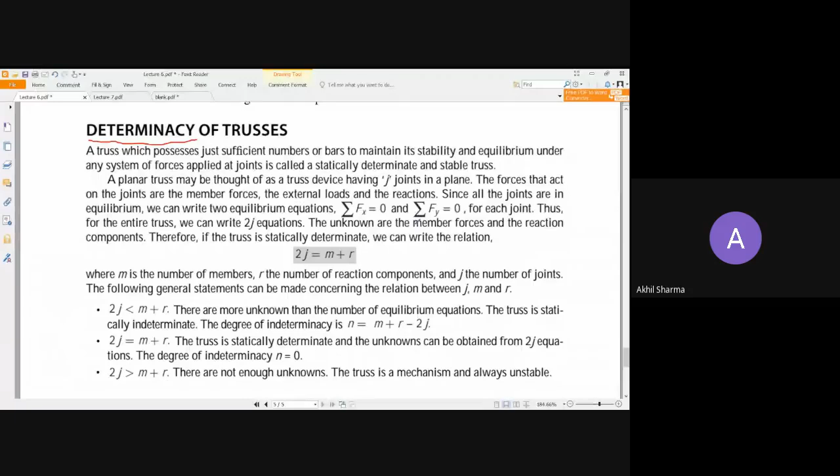Determinacy. The process, means the process, yes. The process of finding the value. No, not process. Process of finding the value is determining only. Because if you say simply that determining something in a truss, that means there has to be a process by which you will determine something, whatever that something is.

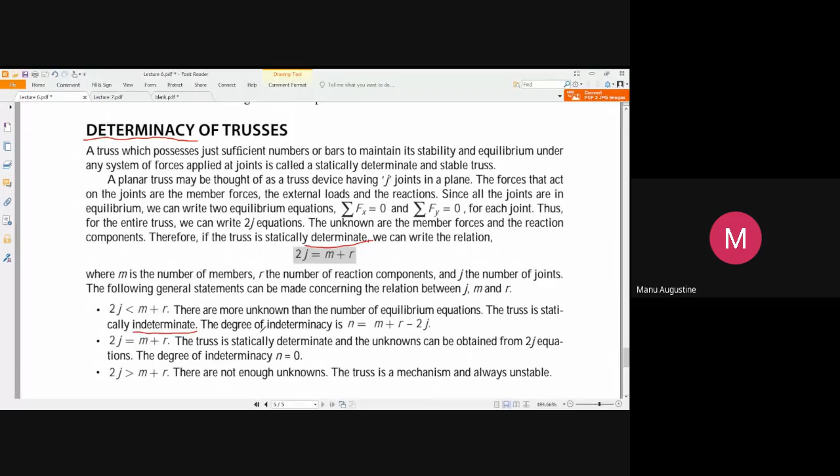What is it that you want to find in a truss? What you want to find in a truss is the forces in the members.

For example, let us say this is a truss, and let us for a moment forget that this is a deficient truss. Let us just assume that there is a diagonal also. If you just put a diagonal here, then this truss becomes stable, and now you can apply the loads.

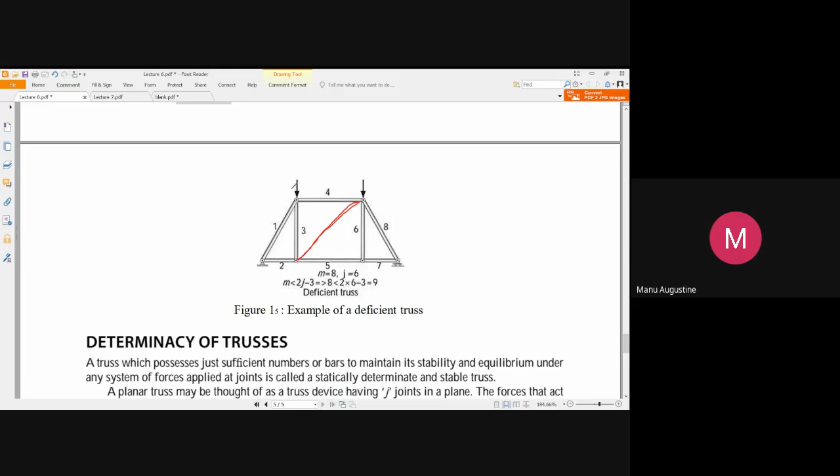So if I apply the loads, this truss is bearing these loads. That means it is now carrying the loads and it is not getting distorted. Now, once the loads are being carried by the truss, the engineers are now interested in understanding what is the individual experience of these members.

What are you feeling? So each of these members, once the complete truss is loaded externally, will be either feeling tension or compression. This was also explained by me in the previous class.

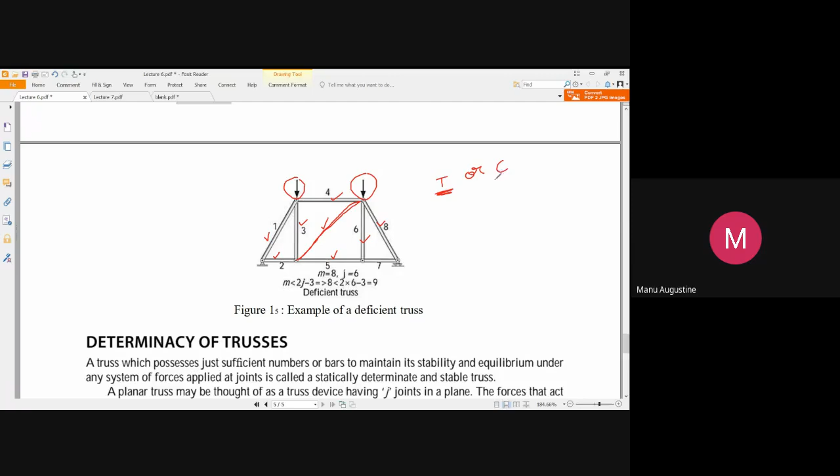So this is what you want to determine in a truss. An engineer makes a truss for some purpose, for a bridge or for some arch or something like that.

He installs in its place, and now the engineer is interested in knowing whether the individual members are happy, meaning whether they are capable of bearing the load or not. That becomes the next stage of design. But as students of engineering mechanics, your scope is limited to determining the individual forces of these members.

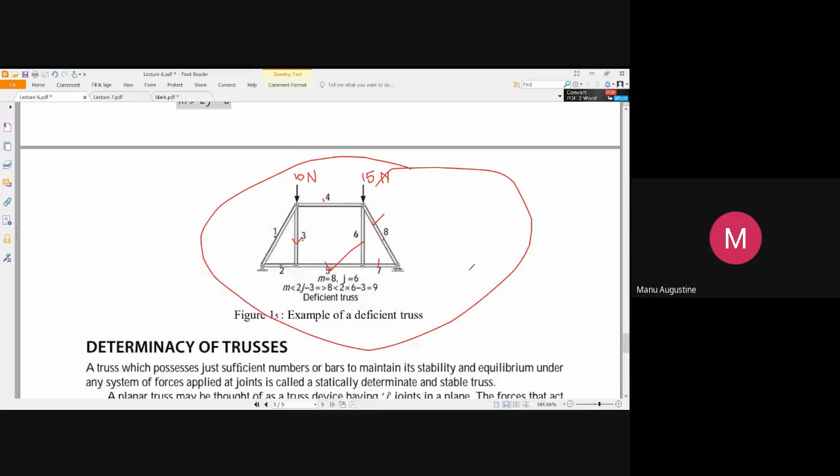Now there is another thing that stands in your way of determining these forces. There is a reaction developed at the supports also. This is a roller support, so it will only generate vertical reaction. This is a simple hinge support or simple pin joint, so it will generate two reaction components: reaction in the vertical direction and reaction in the horizontal direction.

Now, as the mathematics of statics governs, until and unless you find the values of these reactions also, you will not be able to determine all the forces in the members. We will see it in a numerical example later on.

So eventually what I'm saying is, in a given truss, what are the things you want to determine? The first thing is individual forces in the members and their nature, whether tensile or compressive. And because they cannot be determined until you find the values of reactions at the supports, your goal of achieving the determinacy of a truss involves, whether you want it or not, finding the reaction components also. So overall, you have to find all the reactions and all the forces in the members once the truss is loaded. This is what is called determinacy of trusses.

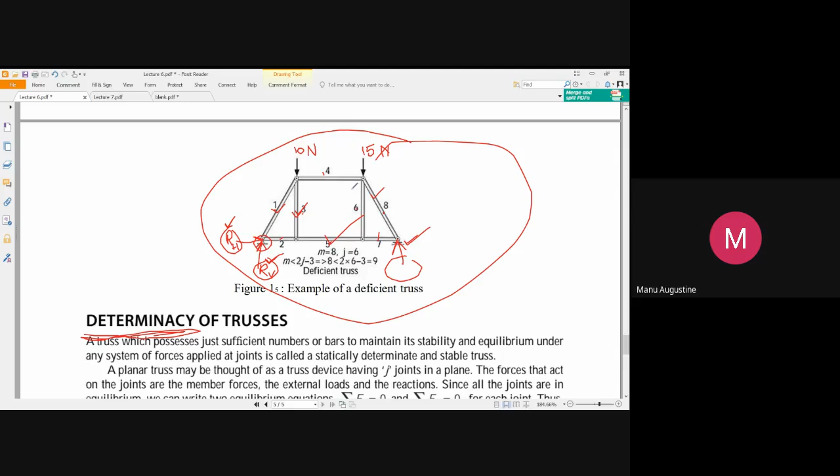Did you understand this concept? What is the meaning of determinacy?

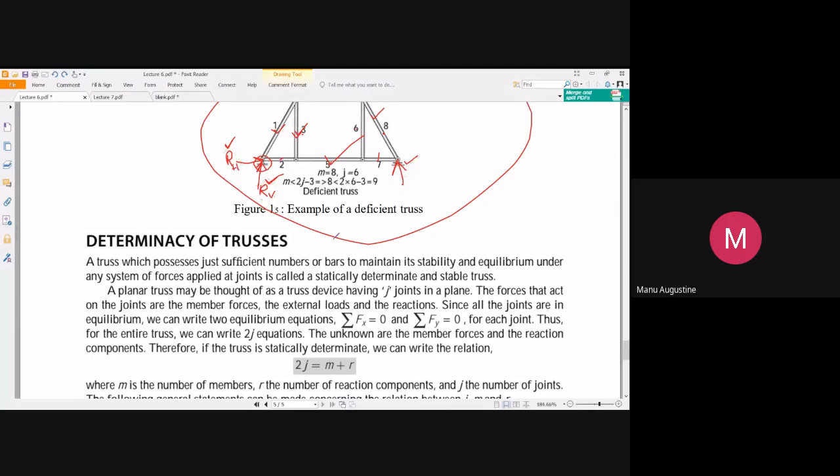What you have to determine is the individual forces in members and the reaction components.

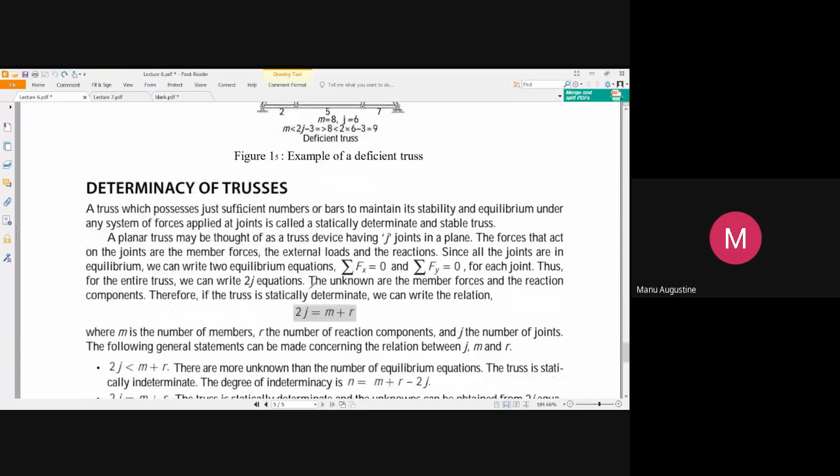Now there is again a mathematical relationship that gives you the direct answer to this question. What does this relationship say? This relationship says count the number of joints in your truss.

So let us come to this truss. Now we are discussing this truss. How many joints are there? Somebody please put the microphone on and tell me how many joints are there. The number of joints is 3. 1, 2, 3 - three joints are there.

Okay, now again this equation says count the number of members in this truss. How many members are there? Three. The value of number of members is equal to 3. First member, second member, and third member. There are 3 members.

And now, the third thing required is how many reaction components are there in your truss. So in order to find the number of reaction components, first you have to see how many supports there are. There are 2 supports, the first support and the second support. Now try to see what reaction components are possible for both supports. The first support B is a simple pin joint. Can anybody tell me how many reaction components will be there at point B?

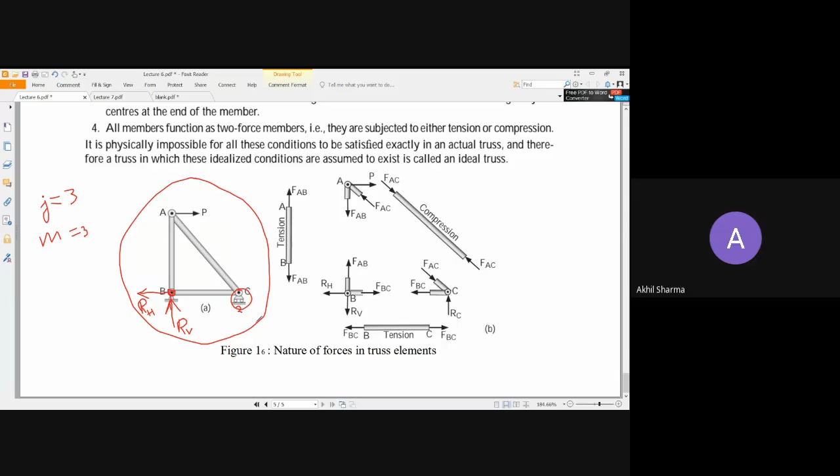Okay, what is the type of reaction and how many reaction components will support 2 have? There will be only one reaction component because of the rollers. We spent a lot of time in the last class studying that if there are roller supports, the roller supports are incapable of developing horizontal reactions. Roller supports never have a horizontal reaction. So only one reaction will come here, which is vertical.

So how many reaction components are there in this complete truss? There are 3 reaction components - 1, 2, and 3 reaction components. So R is 3 in your truss.

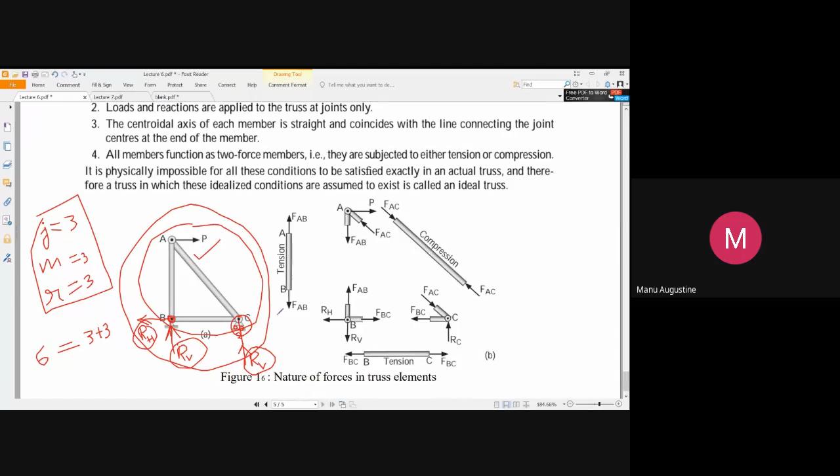And now apply this equation, 2j equals m plus R. What is the value of 2j? Find it from here - 6. 2j is 6. Is it equal to m plus R? Yes, sir. So if this equation is satisfied, which is true in this case, then you say that this truss is determinate. Now tell me, how many total unknowns are there in this?

Just look at the truss, forget about everything, and if you have understood whatever I have said till now, just tell me how many unknown forces are there in the complete truss.

Obviously, as you can see, the force in member AB, this one, the force in member AC, this one, the force in member BC, this one. So these 3 are definitely the unknowns that you want to determine.

And these 3 cannot be determined until and unless you already know the values of these reaction components. So in order to find these desired values of forces, you must have the values of these reaction components also. So this also becomes a necessity - we have to find the reactions, whether we like it or not.

So how many unknowns are there? One force unknown, second force unknown, third force unknown, and 3 reactions unknown. So total unknowns are 6 in number, and that is what the right hand side of the equation represents. This m plus r indirectly tells you how many unknown values are there in your problem.

So if you want to find out - someone randomly draws a truss and gives it to you, and asks how many unknown things you need to determine in this truss - you simply calculate m plus r. That will be the answer to the number of unknowns.

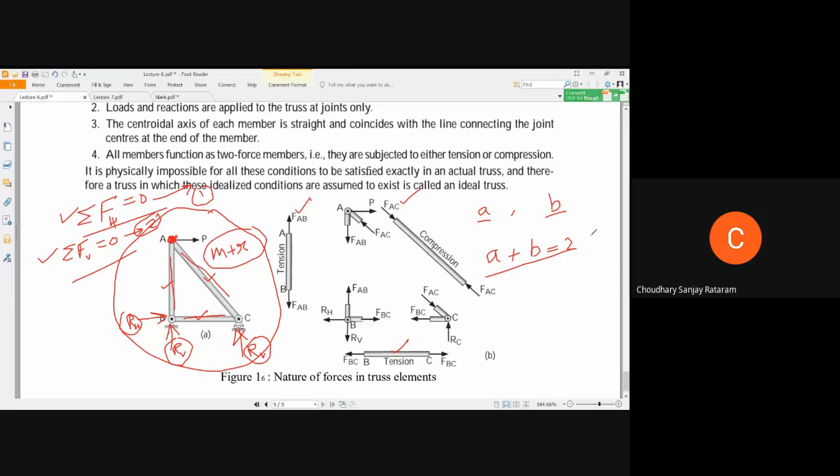Can you find the actual true values of a and b with the help of one single equation? Tell me - can you do it? No sir, you can never find the actual values of a and b because there are infinite number of possibilities.

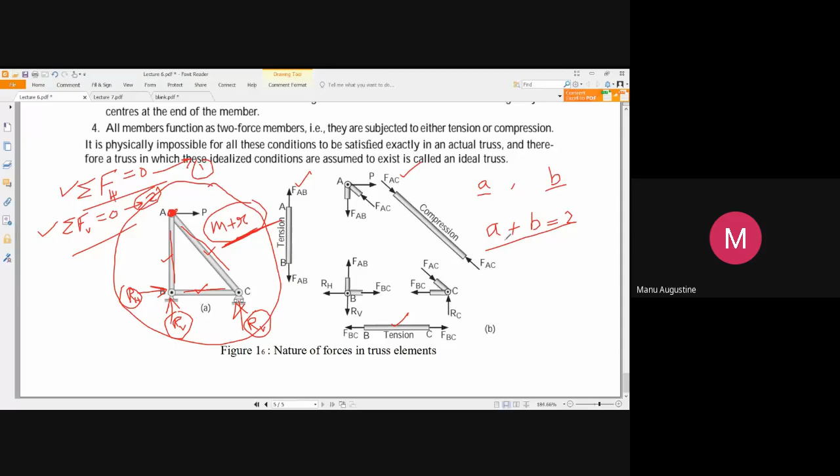Now the statement which we're discussing earlier, if there are two equations, let us say a plus b is 2, but a minus b is 1. Now there are two equations, equation number 1 and equation number 2. So how many unknowns are there? Two unknowns are there. How many equations are there? Two equations are there. Now this problem becomes determinate.

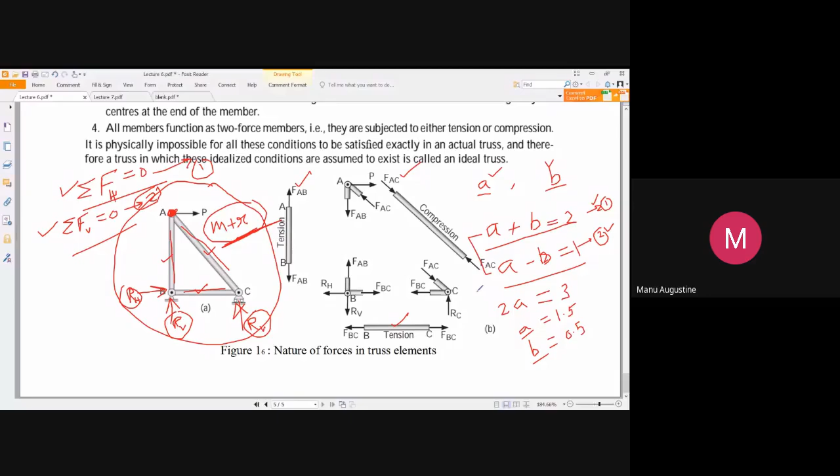If you have n number of unknown values and mathematically you want to find all the n values, then you must have at least n equations. Otherwise you won't be able to solve it. You will never be able to find all the unknown values. So this is the simple logic behind this equation. Now you know what is the logic behind this equation.

Let us once again recapitulate the equation. M plus R is the number of unknown values. 2j is the number of equations. So as we just understood with the example of A and B, if the number of unknowns is exactly equal to the number of known equations, then the problem is determinate. That means you can find all the unknown values of the problem. That is why this equation has been constituted like this.

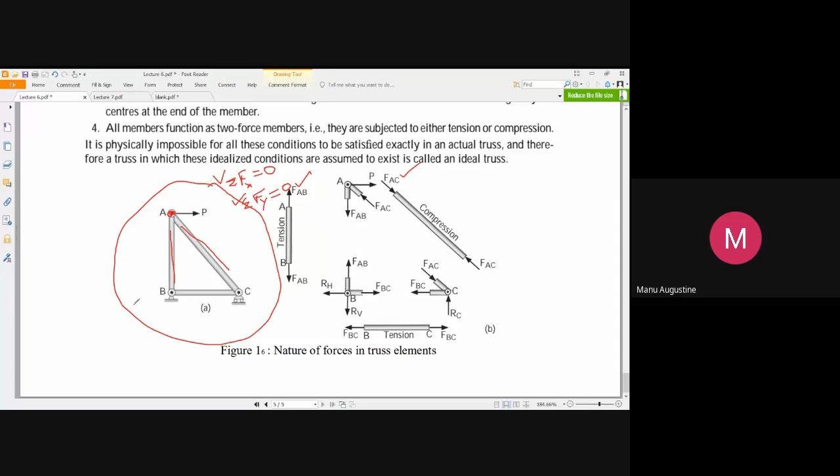Because each joint J represents two equations. Summation of x forces equal to 0 is one equation, and summation of y forces equal to 0 is the second equation for each joint. So if every joint has these two equations, how many total equations does this whole truss have? Twice the number of joints. So that is the eventuality of 2j here.

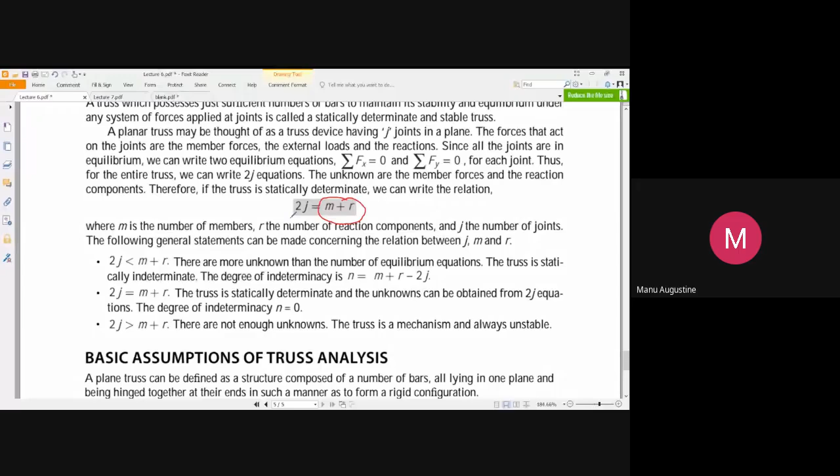So 2j is the number of equations, m plus r is the number of unknowns. And if the number of unknowns is exactly equal to the number of equations, then the problem is determinate. So this is the concept of statically determinate and statically indeterminate problems.

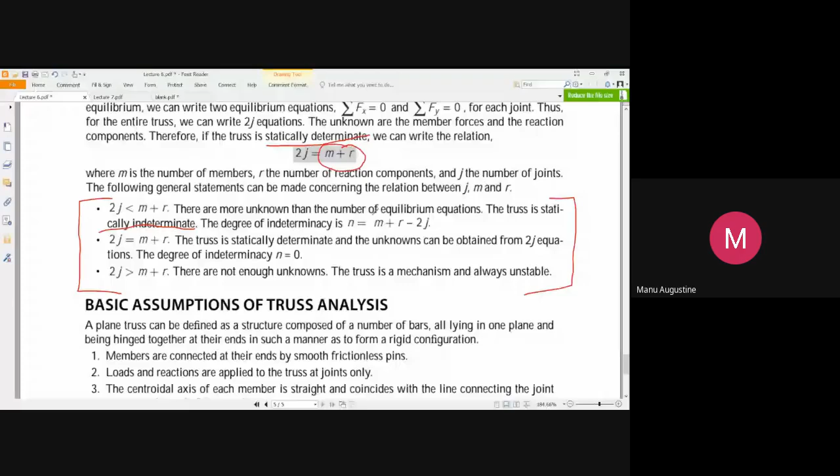Now you read up these three sentences and you can eventually get a good understanding of what this thing means. This small explanation and this small topic can be asked separately in your exams and not as a part of some numerical. You might be required to explain the concept of static indeterminate and static determinate trusses. So you have to expound this particular part in your own words. This much part that I explained here, plus this theory given here, if you remember it and remember how to put it in your own words, this should be sufficient for your examination.

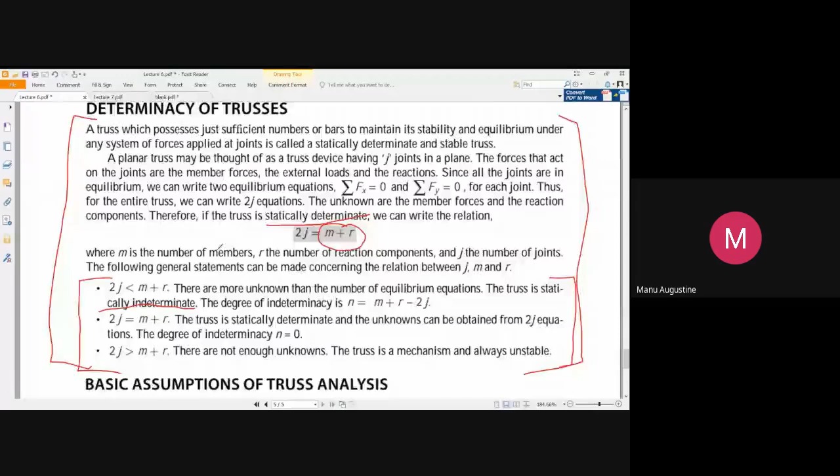Now, basic assumptions of truss analysis. You have to remember this. This is specifically mentioned in your syllabus. This can come as a 2 mark question for you. What are the assumptions taken in truss analysis?

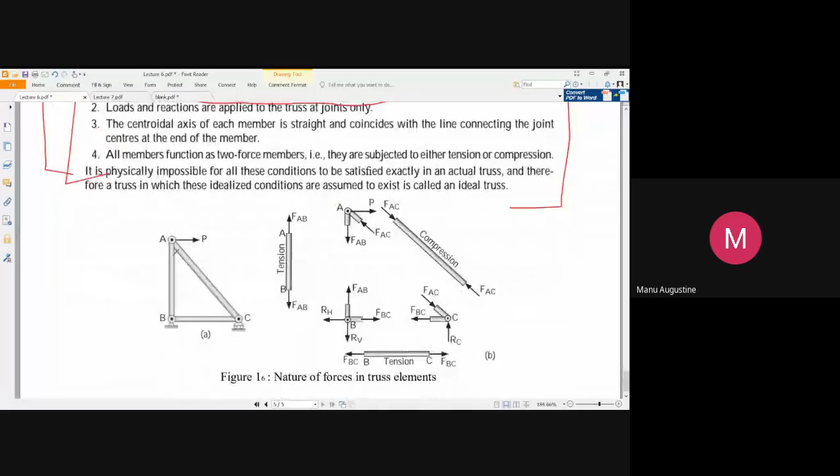You remember these. Members are connected at their ends by smooth frictionless pins. So these pins are smooth and frictionless to allow rotation to accommodate the shifting of the members individually, so that there is no bending inside the members. There is only pure tensile or compressive forces. Second one, loads and reactions are applied to the truss at joints only.

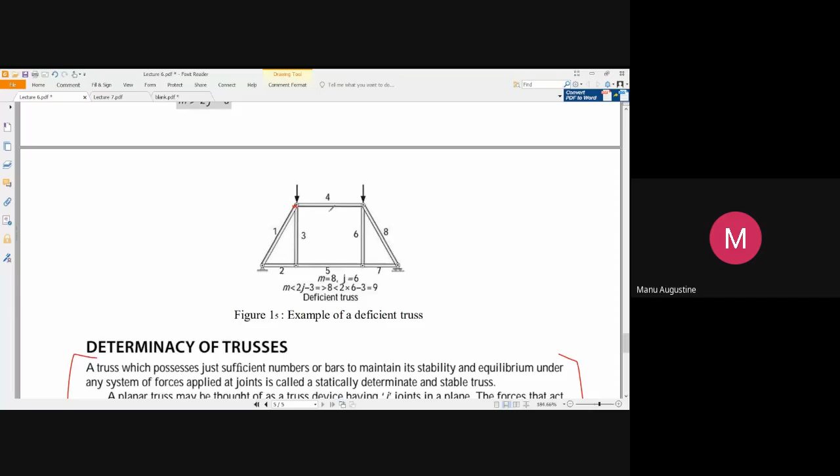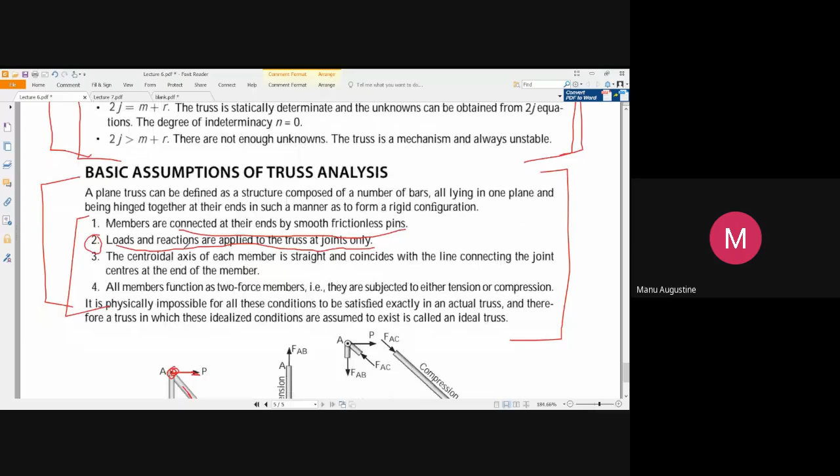Forces are only allowed at joints. See, joint pe force, joint pe force. Look at another truss we will be discussing right now. Look at this one, one force is applied, that is also at the joint. So this is another assumption of truss analysis, that external loads and reactions must be applied at the joints only.

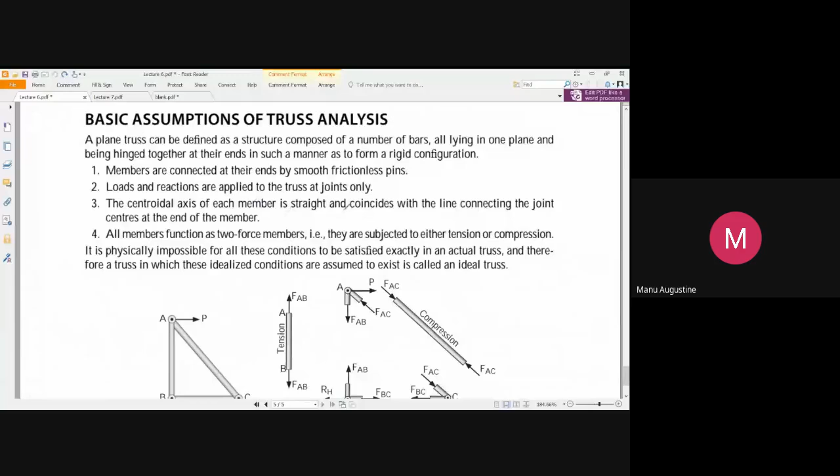What is the third one? The centroidal axis of each member is straight. See, is straight - that means if the centroidal axis, this is its centroidal axis, the imaginary line going from its center, if this line is straight, it clearly means there is either pure compression or pure tension.

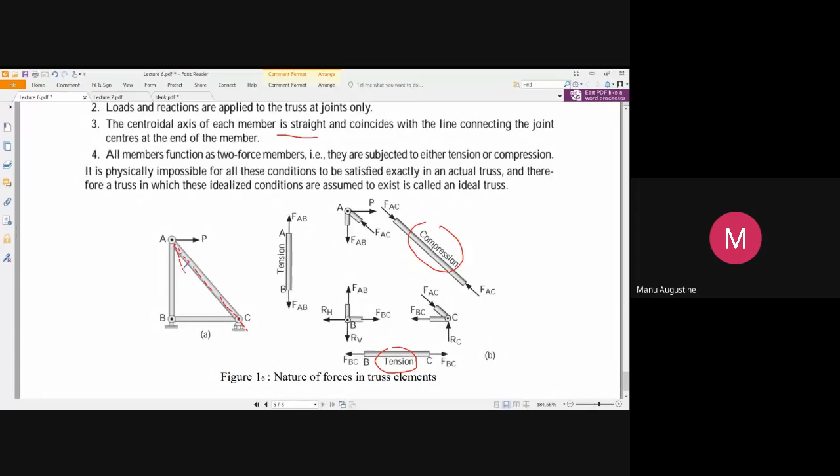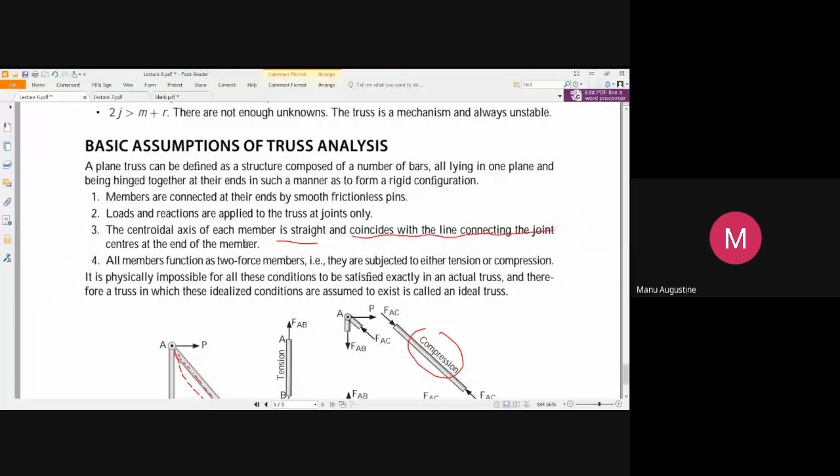If this centroidal line itself bends, it means bending has come into your member. So this is again the restatement of the same assumption we are discussing, but you have to remember it as it is - it coincides with the line connecting the joint centers at the end of member. Each centroidal line will connect the joints.

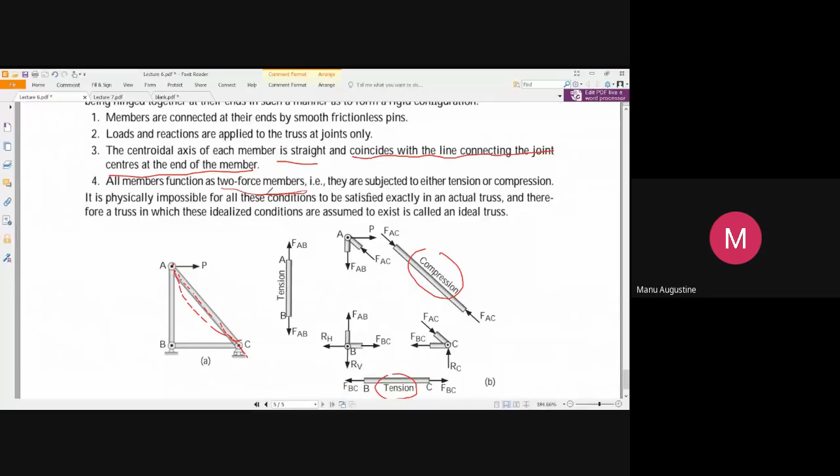That is understood. All members function as two force members. What is the meaning of two force members? Please don't misjudge it - don't ever think that a two force member means a member carrying two forces. No, a two force member means a member which is capable of carrying either of the two types of forces, tensile and compressive. This is what two force member means.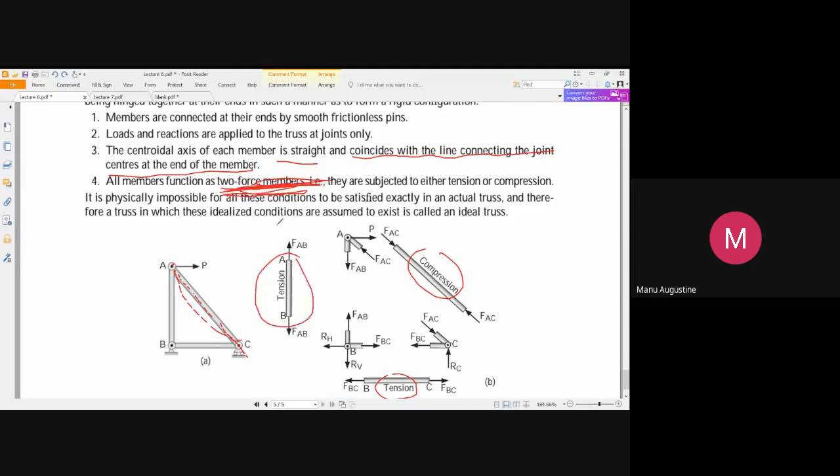So what does this assumption say? This assumption can basically also be rewritten. Instead of writing it as a two force member assumption, you can simply say that individual members are subjected only to either tension or compression and never subjected to bending. This assumption can also be written this way.

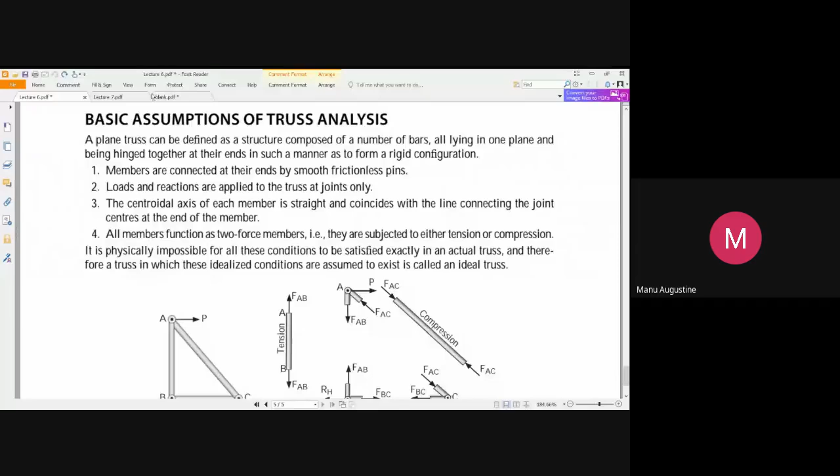So you have to remember these four assumptions as the basic assumptions of truss analysis. Okay, so basically this topic of determinacy of trusses and basic assumptions of truss analysis is over, and now I would like to ask you one question in general. Look at the truss now shown in the figure.

This is the first support, this is the second support. Now just apply the formula 2j equal to m plus r, and just tell me whether this is a statically determinate truss or a statically indeterminate truss.

What is the number of joints? 1, 2, 3, 4, 5, 6. So what is the left hand side? 12.

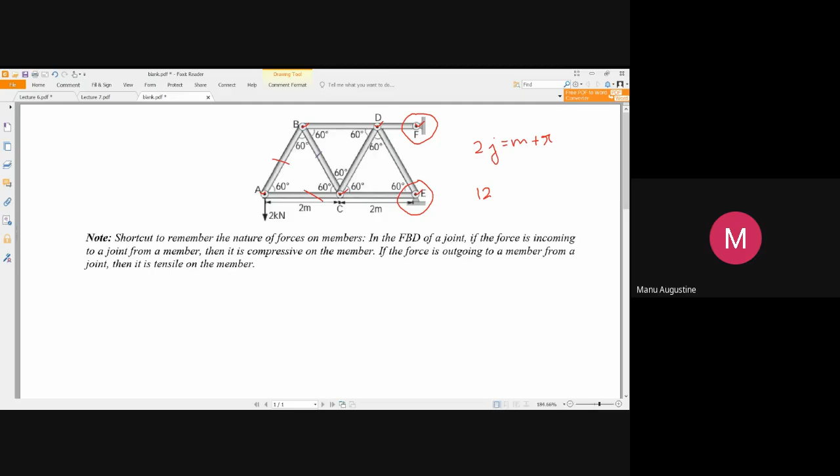Now count the number of members. 1, 2, 3, 4, 5, 6, 7, 8. So let us say there are 8 members.

And now the number of reaction components. For reaction components, you have to look at how many supports are there. In this truss, how many supports are there? There are 2 supports. See, this is not a support, this is hanging in the air, and only a 2 kilonewton force is applied at this joint. There is no support here. How many supports are there? There is no support here. There is no support here. There are only 2 supports at F and at E.

And once you have identified the support centers, you look at the type of support it is. What type of support is this? Is there a roller here or here? No, there are no rollers. These are purely pin joints. So how many reaction components will be developed at each support? There will be a vertical component and a horizontal component, at both the supports.

So how many reaction components are developed at 2 supports? Four. How many? 4. 4. 1, 2, 3, 4. So R is 4.

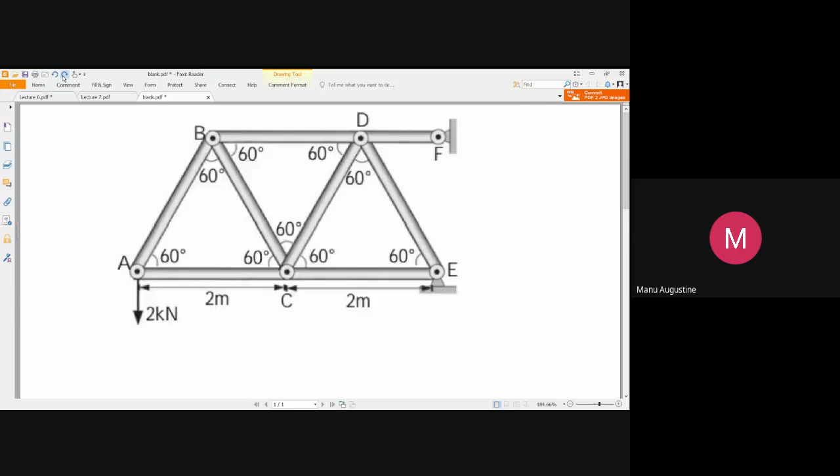So now give your judgment. Is this truss statically determinate or indeterminate? It is statically determinate. And what is the meaning of statically determinate? How many unknown forces are there in this? 12. There are 12 unknown forces. The forces in all individual members is an unknown quantity.

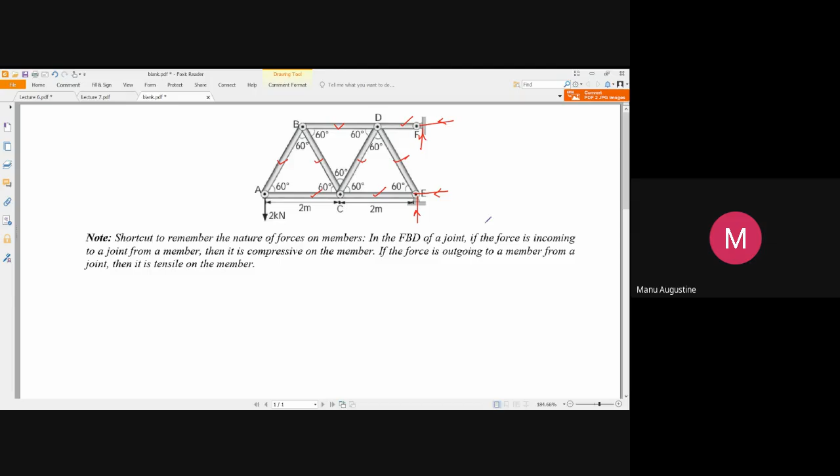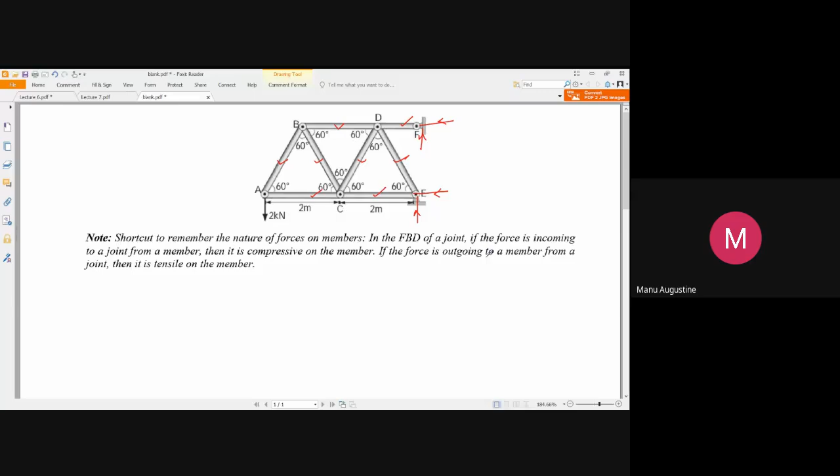So there are 12 unknown quantities and there are 12 number of equations. So if a truss like this is given to you in a problem, which is eventually given in a problem in your note sheet, you will be easily able to solve this truss. Solve a truss means finding all the unknown values. You have to find forces in all members and the reaction components. This is the meaning of this. Okay? Is this much part understood to you?

Is it clear? Yes, sir.

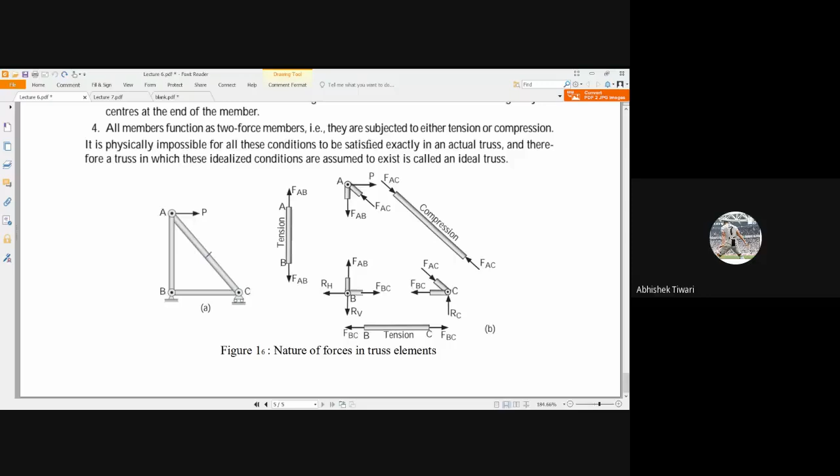Now we can move on to the next part, method of joints for truss analysis.

In your syllabus there are two methods for truss analysis. What does truss analysis mean? You have to find all the unknown forces in a truss. That's all, that is already understood by us. Now what does method of joints mean? Let us quickly, without wasting time, go to the method of joints.

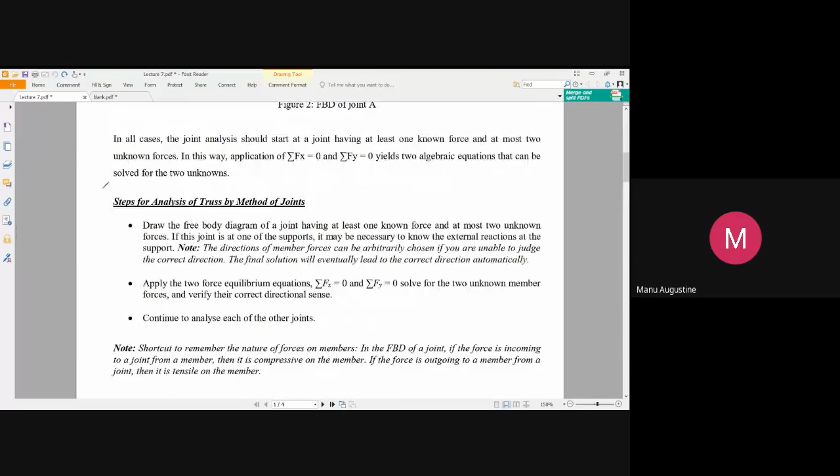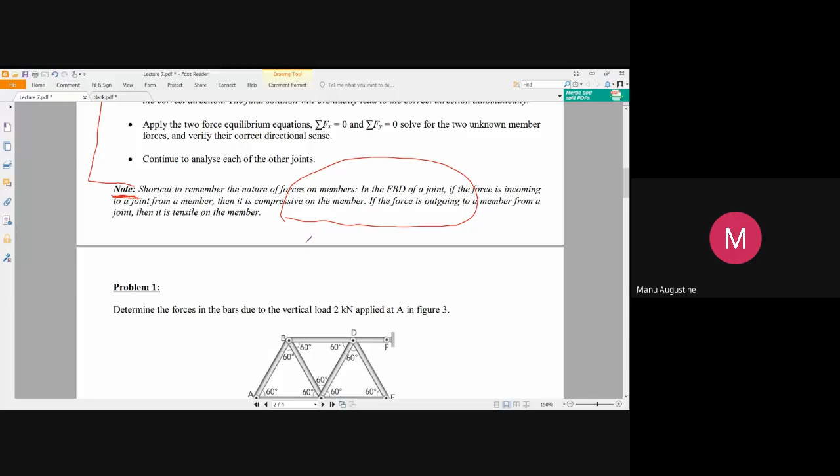I have already given you a detailed description. Notes are there, and I have given my personal opinion in the form of individualized personalized notes, so that you can remember, apart from whatever is given in your textbooks, something extra so that your calculations become easy. And now let us directly come to the problem.

Method of joints. So what are we going to do? Problem 1 says determine the forces in the bars due to the vertical load 2 kilonewton applied at A in figure 3. This is the same truss that we were seeing till now.

Now this is a problem for you. It is having a support here and another support here. Both of the supports are pin joints. None of them is roller. And this complete truss is basically hanging from a wall. If you can see that this is a fixed support, this is a fixed support, you can see that it is literally hanging from a vertical wall.

And at this joint, you have applied a downward force of 2 kilonewton. And with this much information, apart from that, some geometrical information is also given, that all the angles are 60 degrees. That is also given. This is 2 meters, this is 2 meters, and since all the triangles are equilateral, this is also 2 meters, this is also 2 meters.

But we'll see which equations and which information is required by us. But eventually the question that is asked of you is find all the forces in the bars. Is it asking you for reaction here? Is reaction being asked of you? Look at the problem and tell me.

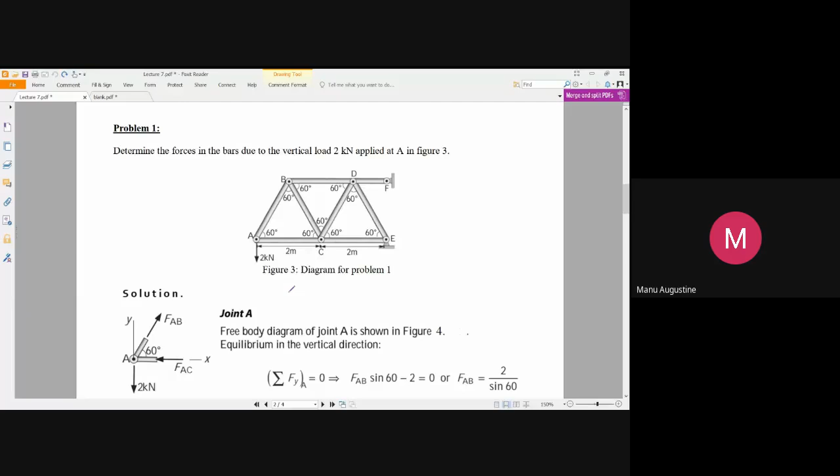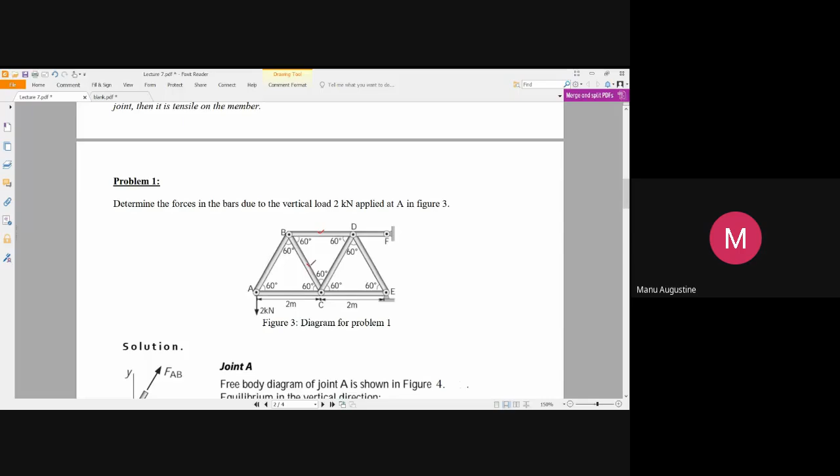Please don't leave the classroom in between, okay? If you are interested, you can just place your phone at some side. Don't listen to the lecture, but it is highly desirable that you listen and understand, क्योंकि ये problems आएगी और आपको अपने intuition से इसको करना आना चाहिए, solve करना आना चाहिए. Now I will very clearly, very slowly try to make you understand how to solve for the unknown forces of a truss by using the method of joints. This is what you are going to learn. Okay? Now let us continue.

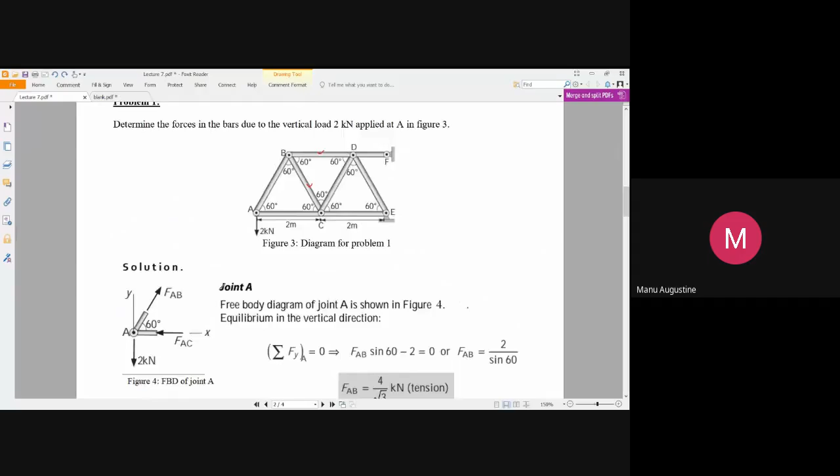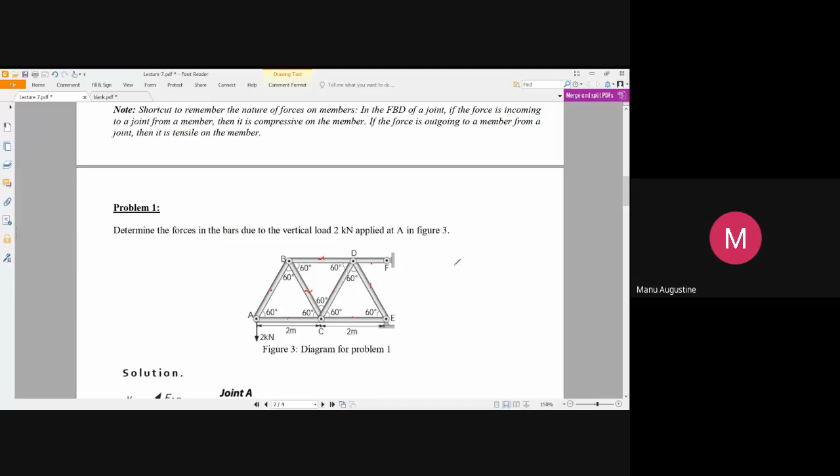अपने को सारी फोर्सेस पता करनी है. कितनी कितनी फोर्सेस पता करनी है? 1 2 3 4 5 6 7 8. 8 forces have to be determined. Now what method of joints tells you is, see, the steps for analysis by method of joint, ये सब यहाँ पर मैंने verbally यहाँ पर लिखा हुआ है, लेकिन अब इतनी ज्यादा अपन उसमें पढ़ा लिखा पढ़ी नहीं करेंगे. We will simply try to understand what has to be done.

You go to one joint at a time, and at each joint apply this equation. The summation of all horizontal forces is 0, and the summation of all vertical forces is 0. You apply these two equations by going to each joint individually, and that is the start and end of the procedure. बात यहीं चालू होती है और यहीं खत्म हो जाती है.

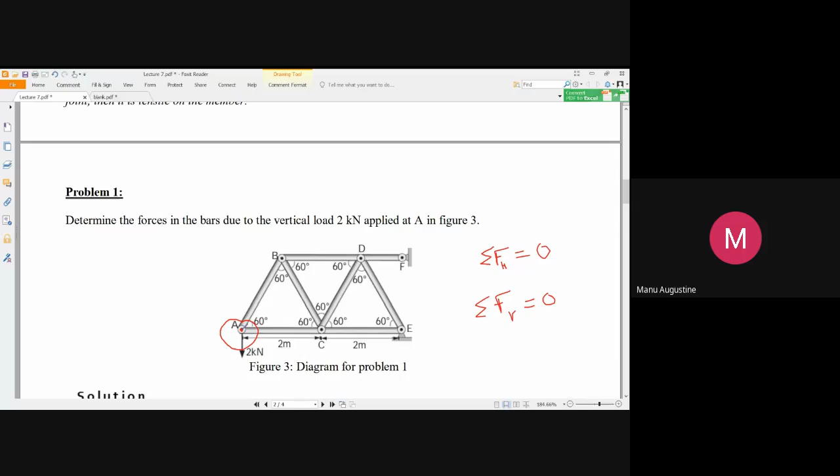आपको लगेगा कि सर ये तो बहुत आसान थी बात, मगर इसमें आपको अपना लॉजिक और अंडरस्टैंडिंग एक्स्ट्रा यूज करना पड़ेगा. अब इसमें नियम क्या है? नियम यह है कि आप पहले वो जॉइंट ही लें जिसमें कम से कम एक फोर्स तो नोन हो और ज्यादा से ज्यादा दो अननोन हो. दिस इज वेरी इंपॉर्टेंट फॉर यू टू रिमेंबर. आई हैव पुट इट इन वर्ड्स आल्सो.

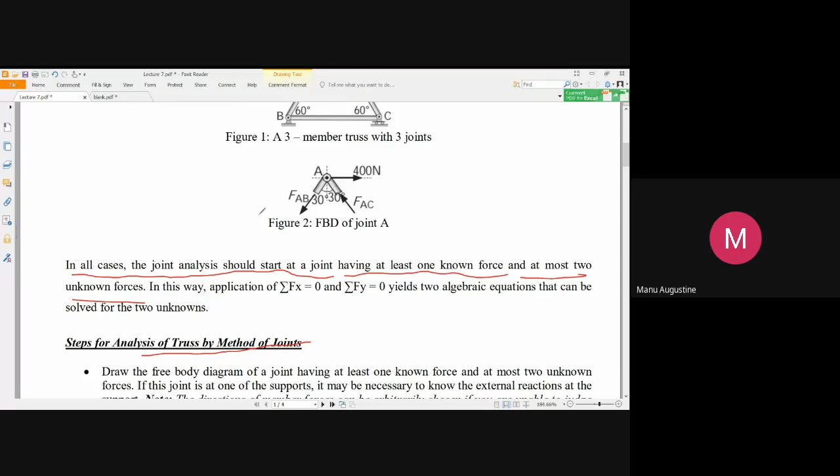In all cases, the joint analysis should start at a joint having at least one known force, यानी कम से कम एक फोर्स तो पता होनी चाहिए जॉइंट पे, and at most two unknown forces, यानी कि उसी जॉइंट पे जिस पे कम से कम एक फोर्स पता है, उस जॉइंट पे दो से ज्यादा अननोन फोर्सेस भी नहीं होनी चाहिए. ये नियम है आपका जॉइंट सिलेक्शन का. ठीक है? So once again, we have to find the forces in each bar.

We are using the method of joints, and in method of joints all you have to do is go to each joint individually. First analyze joint A, then analyze joint B, then C, then D, then E, then F. You will find that you don't need to go to all the joints, since before that your forces will already be known. But which joint do you need to select first?

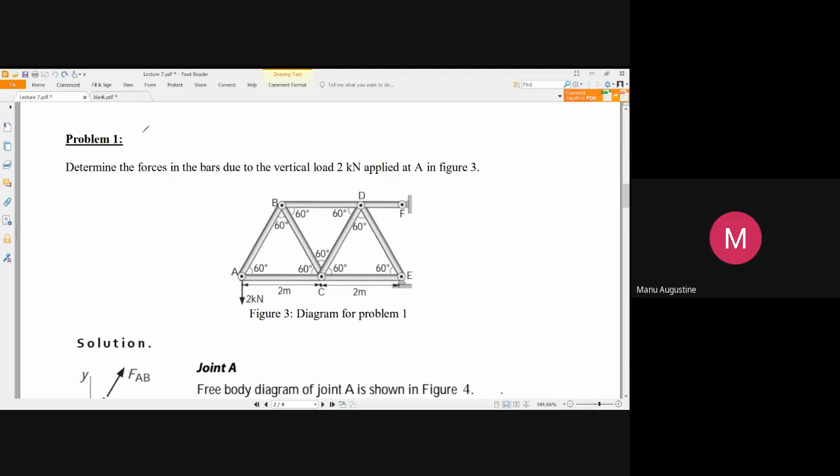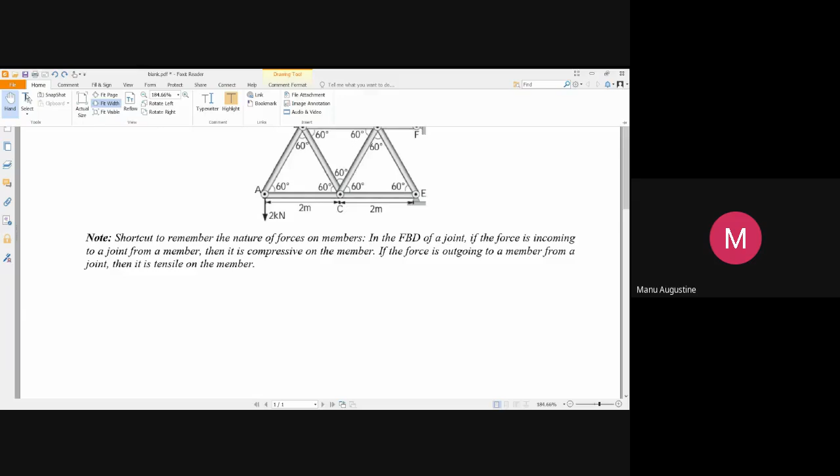Now what you have to do is draw the free body diagram of joint A. Now look at this figure. I am drawing the free body diagram of joint A. Let me get a little bit more space for you here. Now this is the free body diagram of joint A. I put a point. This is A.

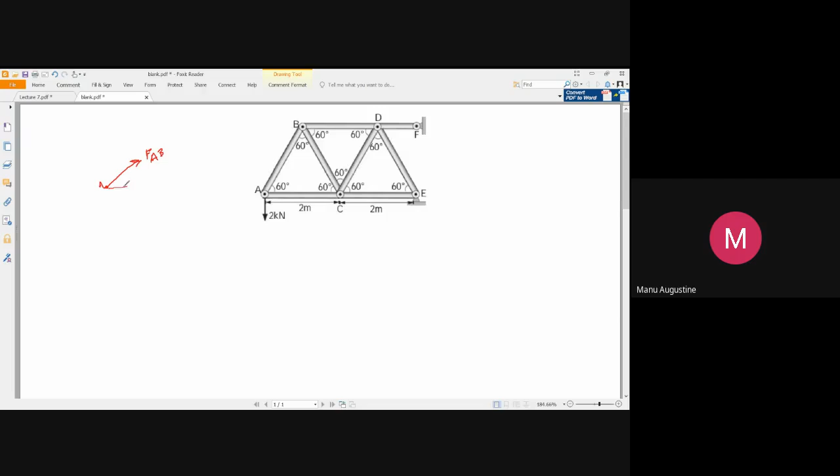There is a force, we will call it as FAB. There is another unknown force which is horizontal, this is FAC. And there is a downward force which is 2 kilonewton. This is 60 degrees. What is this angle? 90.

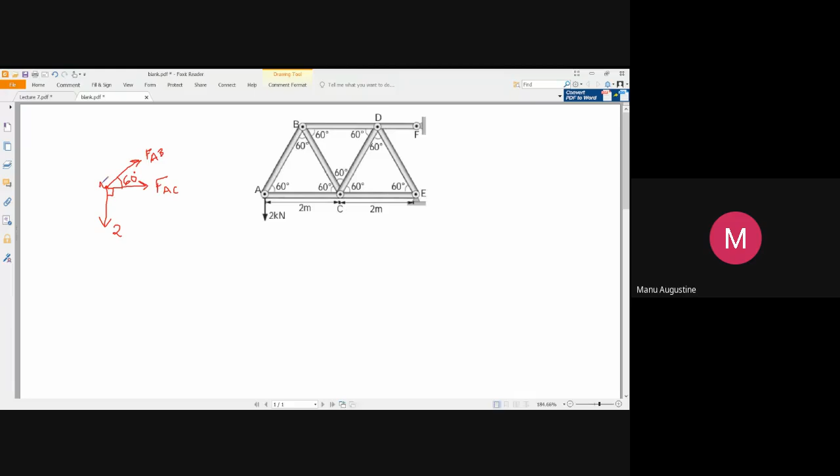And whenever you take a joint and draw the free body diagram, you put an imaginary axis over it. So this is the x-axis, this is the y-axis. There are two unknown forces, there is one known force.

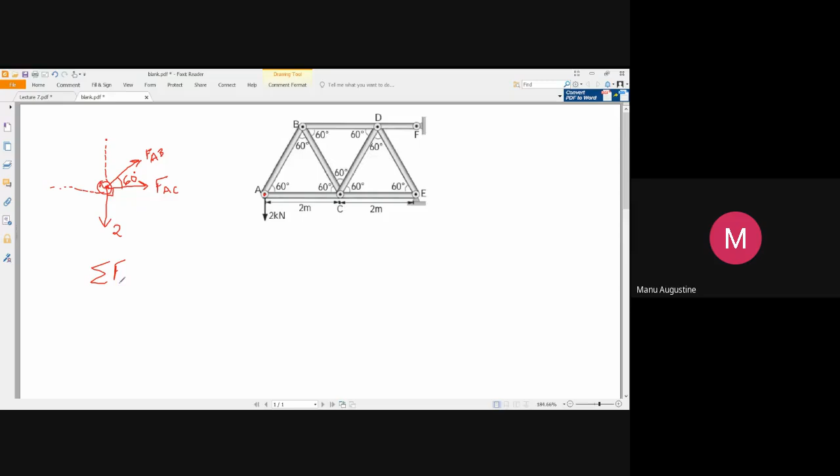Now at this point at joint A, what you have to do is apply this equation first: summation of all horizontal forces is equal to zero. Can you make up this equation? If you cannot, I will make it up for you, because this is the first time I am explaining this concept.

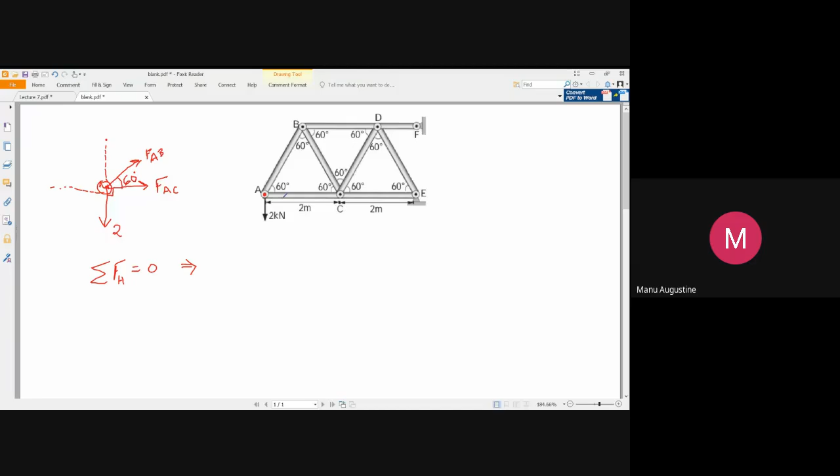What does free body diagram of joint A mean? This is what you have to understand first. It should indicate the forces acting on point A. So FAB, which I have drawn in this figure, is actually not the force being experienced by rod AB. This is actually the force that rod AB is pulling the joint A with.

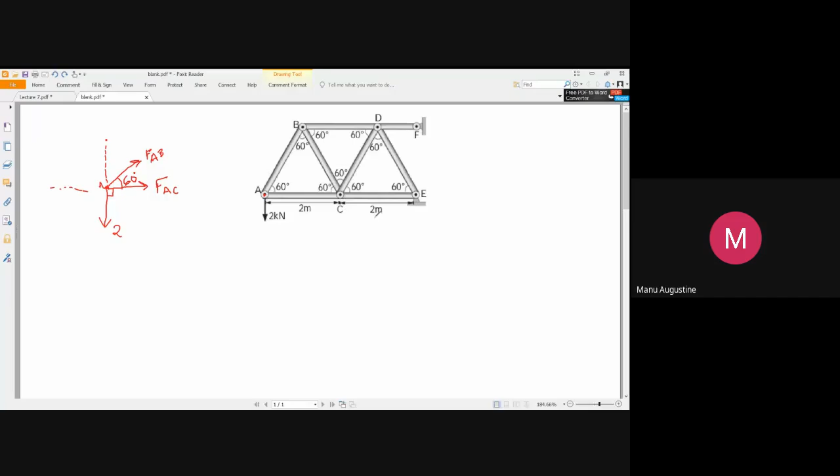ई पॉइंट। ई पॉइंट पे sir. आपके कितने अननोन है? कोई नॉन फोर्स है क्या, पहले ही बताओ। सिर्फ ये ई पॉइंट ले लो। ई पॉइंट पे कोई नॉन फोर्स है ही नहीं, कुछ भी नहीं पता ई के बारे में, तो इसलिए ई पॉइंट लोगे तो कुछ नहीं मिलेगा आपको, यू विल गेट नथिंग।

बी कौन सा फोर्स? यू विल टेक बी पॉइंट। क्यों? क्योंकि अब आपको बी पॉइंट में एक अननोन तो ये है, एक अननोन ये है, क्या ये अननोन है क्या? ये तो मिल गया आपको सर। FAB मिल गया, तो इसलिए अब बी पॉइंट सेलेक्ट करेंगे अपन, क्योंकि इसमें दो तो अननोन है, दिस इज अननोन, दिस इज अननोन, बट दिस इज नोन, ये पता है।

तो नेक्स्ट व्हाट यू विल डू इज ड्रॉ द फ्री बॉडी डायग्राम ऑफ पॉइंट बी। अब बी पॉइंट लिया आपने और बी का फ्री बॉडी डायग्राम बनाएंगे। तो पहली फोर्स तो अज्यूम करो, देखो इसके बारे में मुझे कुछ पता नहीं है, मैं वापस से हवा में तीर लगा रहा हूं। सो आई विल पुट इट एज FBD। ये बी और डी को कनेक्ट कर रहा है ना ये रॉड, तो अब मैं इसका नाम दे देता हूं FBD। और ये डायरेक्शन मैंने ऐसे ही ले लिया है, ये बाद में जैसा आपने अभी देखा था ऑटो करेक्शन हो जाता है इसका।

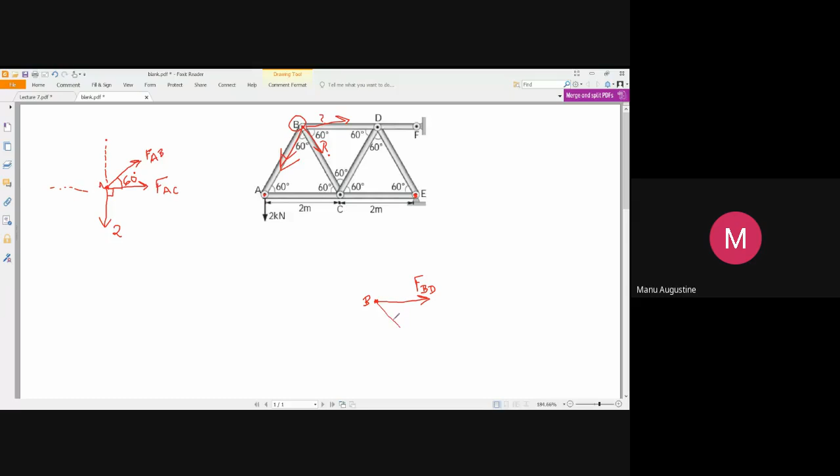एंड देयर इज अनदर फोर्स, इसको क्या नाम दूं मैं? बी पॉइंट का फ्री बॉडी डायग्राम है ये, FBC। और एक फोर्स है ये वाली। अब मेरे को इसका करेक्ट डायरेक्शन बताओ। देखो इसका डायरेक्शन आपको पता लग चुका है ऑलरेडी, ठीक है?

सोच करके बताना, मैं इसका एरो नीचे को लगाऊं या ऊपर को लगाऊं? थिंक एंड टेल, यहां से देख करके मत बोलना, गलत हो जाएगा।

FAB टेंसाइल है कि कंप्रेसिव है? टेंसाइल है सर। FAB में टेंशन है। टेंशन का मतलब क्या होता है कि ये रॉड खिंची हुई है, कंप्रेशन का मतलब है रॉड दबी हुई है।

तो अब मेरे को ये बताओ, एक खिंची हुई रॉड बी पॉइंट से कनेक्टेड है, तो खिंची हुई रॉड जो है वो बी पॉइंट को कैसा एक्सपीरियंस देगी, बी पॉइंट को नीचे को खींचेगी या बी पॉइंट को ऊपर धक्का देगी, सोच के बताओ। खींचेगी सर। खींचेगी नीचे को। सो आई एम ड्रॉइंग दिस डायरेक्शन, ये बताओ ये करेक्ट डायरेक्शन है कि गलत डायरेक्शन है?

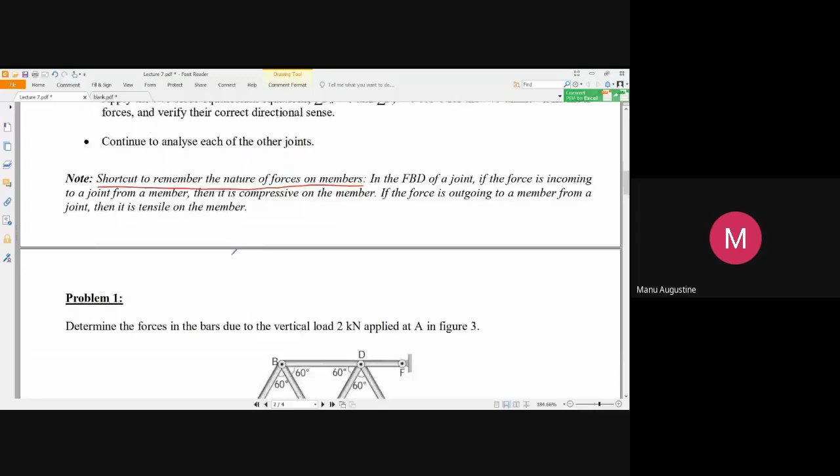करेक्ट सर। बिल्कुल करेक्ट डायरेक्शन। सो दिस इज द वैल्यू ऑफ एफएबी। लेकिन अब मैं इसको एफएबी नहीं लिखूंगा क्योंकि अब ये अननोन नहीं है। एफएबी की वैल्यू कितनी है? 4/√3। 2.31 किलोन्यूटन। ये रहा ना, एफएबी इज 4/√3। यस सर।

तो इस तरह से अब जो नोन फोर्सेस है उसकी करेक्ट डायरेक्शन लगाओ एंड अगेन ड्रॉ द कोऑर्डिनेट सिस्टम। ये वर्टिकल वाई एक्सिस हो गई, ये हॉरिजॉन्टल डायरेक्शन हो गया। ये टोटल 60 डिग्री था, सो दिस मस्ट बी 30 एंड दिस मस्ट बी 30। अब ये वापस से पूरा खेल वहीं पर आ गया जो आपने जॉइंट ए के लिए किया था। ये कितना एंगल है? दिस इज 60।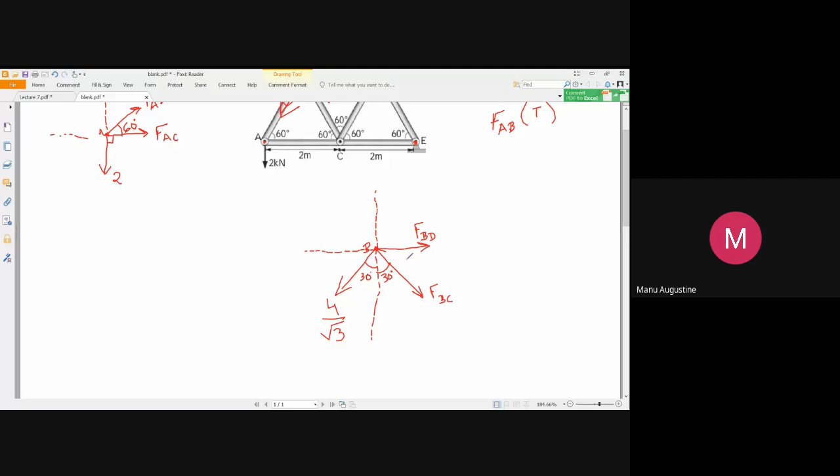नाउ कैन यू डू दिस एनालिसिस ऑन योर ओन?

दो अननोन फोर्सेस, एक नोन फोर्स। इसको वापस से वही सेम स्ट्रेटजी, समेशन ऑफ ऑल हॉरिजॉन्टल फोर्सेस इक्वल टू 0 केप्ट करना है। एक इक्वेशन आएगी विथ प्रॉपर साइन। 4/√3 का हॉरिजॉन्टल कंपोनेंट इधर को बनेगा तो ये नेगेटिव लेना है। एफ बी सी का हॉरिजॉन्टल कंपोनेंट राइट साइड को बनेगा तो ये पॉजिटिव। एफ बी डी प्योरली हॉरिजॉन्टल है तो पॉजिटिव सीधे रख दो।

देन समेशन ऑफ एफ वर्टिकल इक्वल टू 0, इसको अप्लाई करोगे तो दूसरी इक्वेशन आ जाएगी। इवेंचुअली एफ बी डी और एफ बी सी आपको इन दोनों से मिल जाएगा जैसे अपन ने पहले डिस्कस किया था। एंड आफ्टर यू सॉल्व फॉर पॉइंट बी, टू मोर फोर्सेस बिकम नोन टू यू।

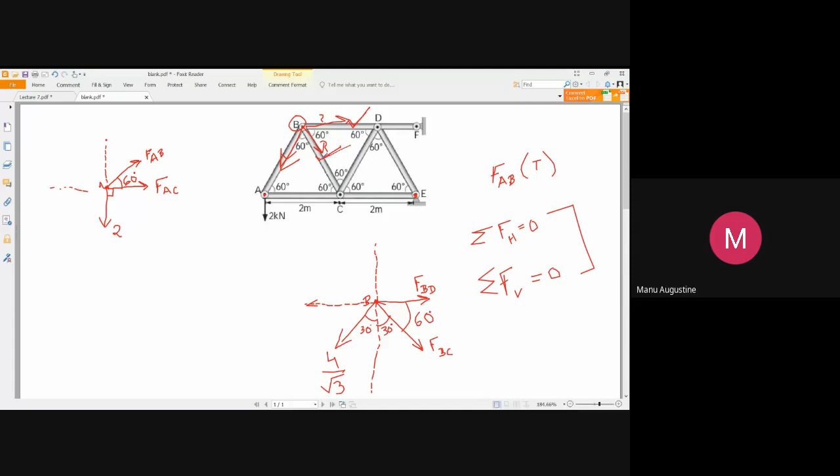अब ये भी पता लग गई, ये भी पता लग गई। अब इसके बाद कौन सा जॉइंट लोगे नेक्स्ट? अब आप बताओ।

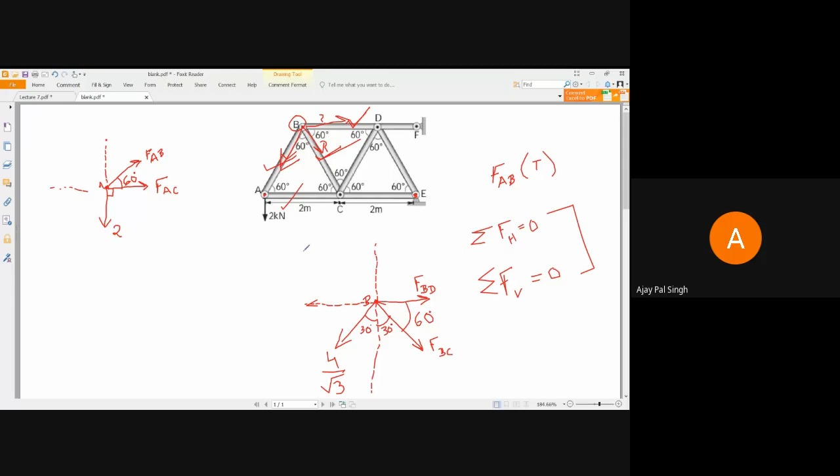डी। yes, you can take point D or even point C। point C ले सकता हूँ? जरा सोच के बताओ। यस सर, ले सकते हैं क्योंकि बीसी नोन हो जाएगी।

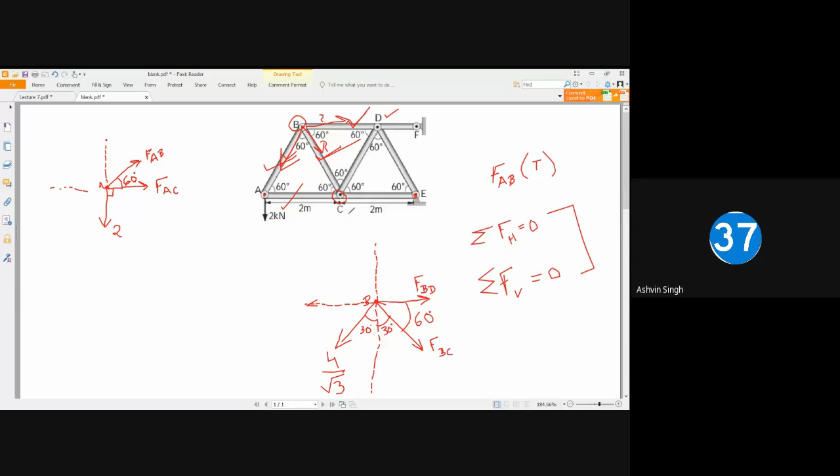क्योंकि आपको एफ बी सी पता है और एफ ए सी पहले से ही पता है। तो आपके जॉइंट पे टोटल फोर्सेस कितनी है? 1 2 3 4। लेकिन इन चार में से दो तो नोन है और कंडीशन क्या है? कम से कम एक नोन होनी चाहिए। आपको ऑलरेडी दो नोन है और ज्यादा से ज्यादा दो अननोन होनी चाहिए और दो ही अननोन है। तो आप चाहो तो अपनी एनालिसिस पॉइंट डी पे कर सकते हो या अगर आप चाहो तो पॉइंट सी पे कर सकते हो।

सो इट इज योर चॉइस। यू हैव टू मूव वन जॉइंट एट अ टाइम एंड मेकिंग श्योर दैट at whichever joint you land, there must be at least one known force। एक से ज्यादा नोन है तो बहुत अच्छी बात है, जैसे कि पॉइंट सी के केस में दो नोन है और दो अननोन है। और किसी भी जॉइंट का जब एनालिसिस करोगे तो उस जॉइंट पे दो से ज्यादा अननोन फोर्सेस नहीं होनी चाहिए।

तो इस तरीके से बाय मूविंग फ्रॉम वन जॉइंट टू द सेकेंड टू द थर्ड टू द फोर्थ, इवेंचुअली आपको सारे जॉइंट्स पे जाने की जरूरत नहीं पड़ेगी। देखो दो जॉइंट पे गए और चार फोर्सेस मिल गई, तो क्या सारे जॉइंट्स पे जाना पड़ेगा? बिल्कुल नहीं।

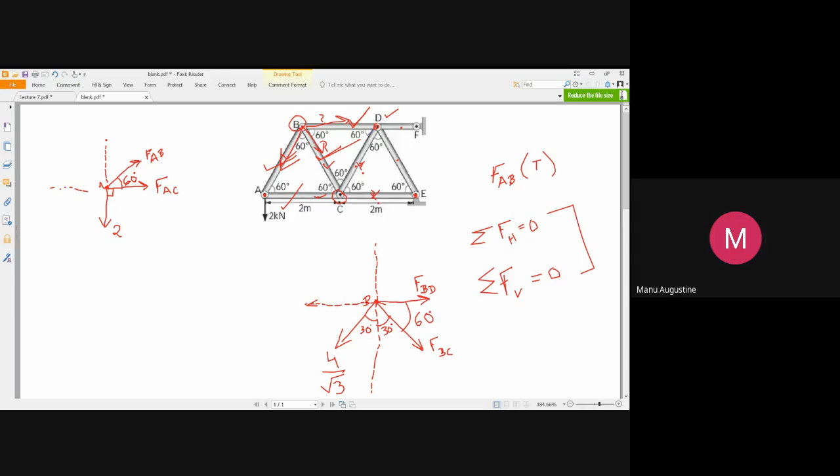आप पॉइंट सी पे चले जाओ, ये दोनों भी मिल जाएंगी। अब सिर्फ दो अननोन रह गई। बस एक पॉइंट डी पे और चले जाओगे तो सारी फोर्सेस नोन हो जाएंगी। तो यू सिंपली हैव टू मूव फ्रॉम पॉइंट ए टू जॉइंट बी, देन टू जॉइंट सी या डी, व्हिचेवर यू चूज़, एंड देन टू जॉइंट डी या सी। यानी A B C D का प्रोग्रेशन अगर आप लॉजिकली फॉलो करोगे, you will get all the forces in all the members। ये पूरा तरीका, शॉर्टकट ट्रिक्स, ये सारी चीजें आपको क्लियर हो गई क्या?

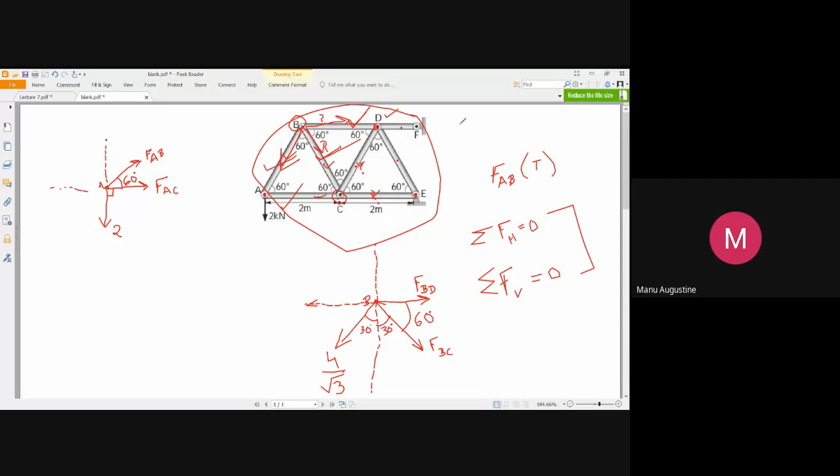यस सर हो गई। So we will stop the lecture today, and now there is an additional problem in the sheet। ये वाली प्रॉब्लम तो पूरी सॉल्व कर रखी है तो इस शीट से आपको पता लग ही जाएगा।

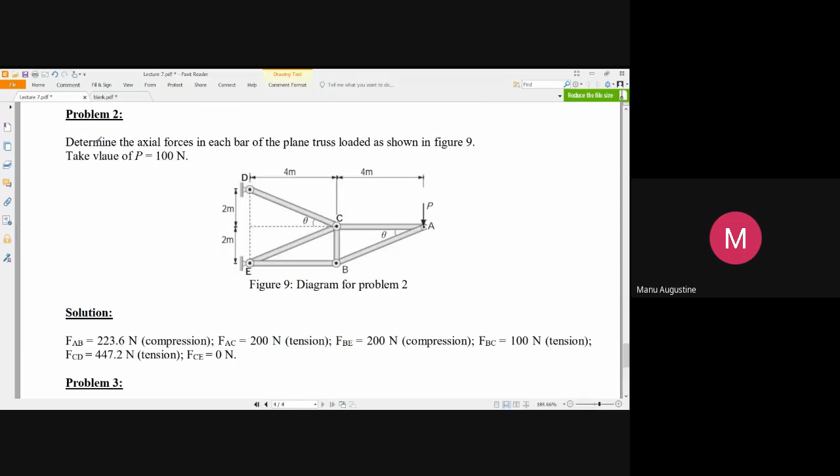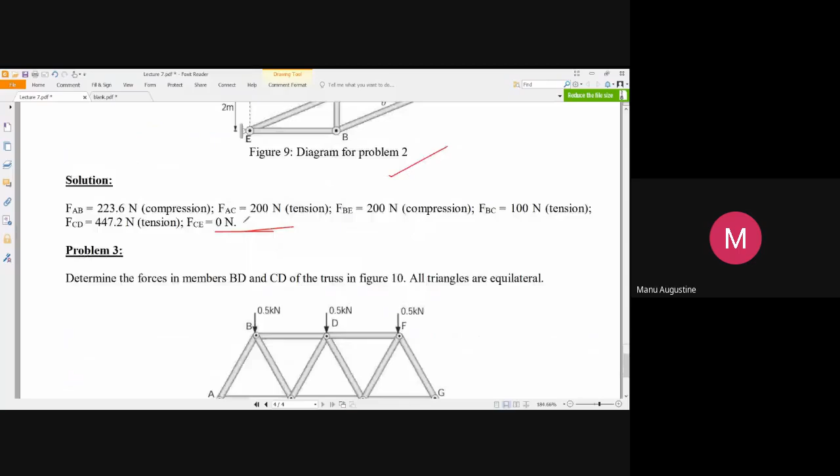प्रॉब्लम नंबर 2 सॉल्व नहीं कर रखी है लेकिन ऑलमोस्ट वैसी ही है। इट्स अ वेरी सिंपल प्रॉब्लम, इसको आप अपने आप करने की कोशिश करो। सॉल्यूशन दे रखा है यहाँ पे। प्रॉब्लम नंबर 3 इज अगेन अनसॉल्व्ड एंड द सॉल्यूशन इज गिवन।

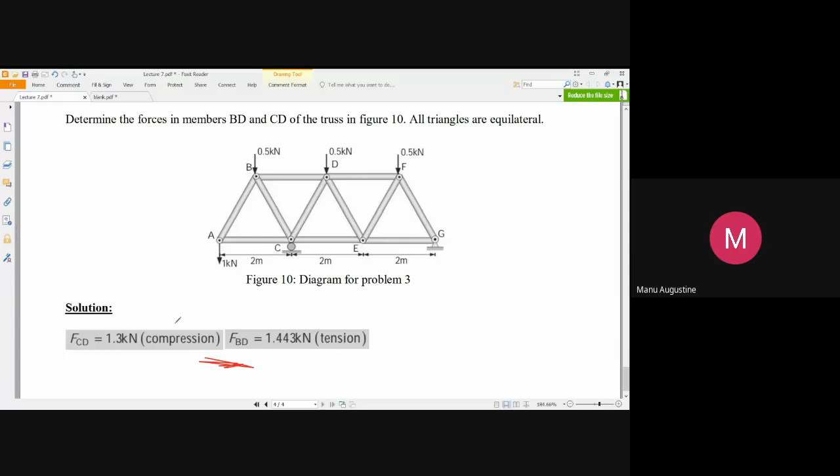ठीक है, इन सबको मेथड ऑफ जॉइंट से आप आज ही सॉल्व करें, और अगर आपके ये करेक्ट आंसर्स आ गए तो आप 100% रेस्ट एश्योर्ड रह सकते हो कि मेथड ऑफ जॉइंट्स ऑफ ट्रस एनालिसिस से लेकर के जो आपकी आरटीयू की प्रिपरेशन है वो कंप्लीट है। तो बेटे ये मैंने आपको पहले ही बोल दिया था, यू हैव टू प्रिपेयर फॉर योर एग्जामिनेशन एवरी सिंगल डे।

हर दिन आपको पढ़ाई करनी है। अगर आप अपनी पढ़ाई को टालते रहेंगे, खासकर इंजीनियरिंग मैकेनिक्स में, तो आप फंस जाओगे एंड मोमेंट में जाके सारे प्रॉब्लम सॉल्व नहीं कर सकते।